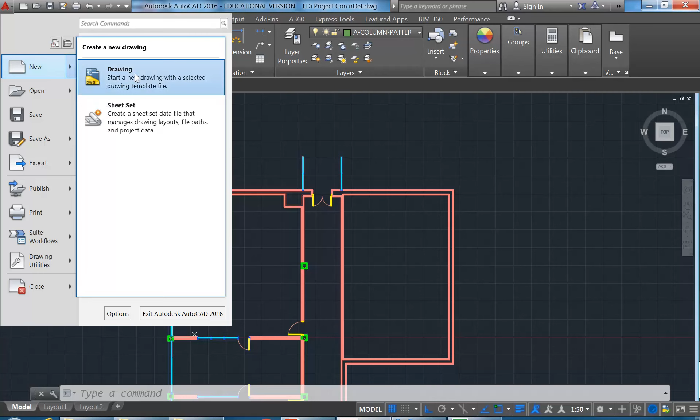So I'm going to make a new file, just going to the main menu, new, and then drawing, and make sure I use the ACAD ISO template as always.

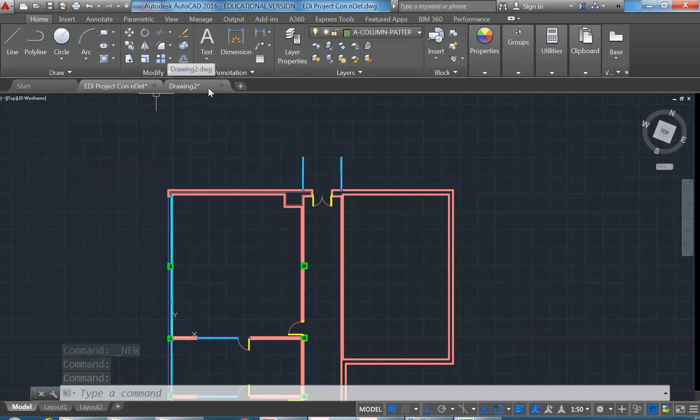And then into this file I'm going to create an XREF, or an external reference, using the previous file. So just remember, in AutoCAD you always have tabs these days at the top. If you're using an older version of AutoCAD you won't have these, but they've had the tabs for the last few releases. And the tabs make it much easier to switch between files.

And it's very important with AutoCAD that you can navigate between different files, because you'll often have the drawings separated and distributed between several files in most projects.

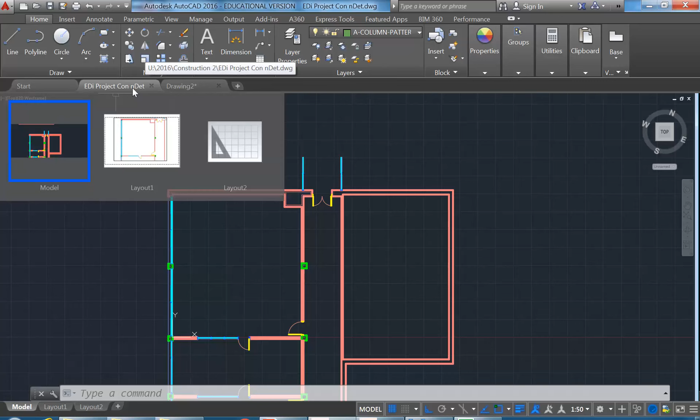And so I'm going to go back to the original file and make sure it's saved. And you can tell that it's been saved because there'll be an asterisk next to the name if it hasn't been saved. And that's a really important thing as well when you're working in AutoCAD, to realise which files have been saved and which ones haven't.

So this one here, Drawing 2, hasn't been saved yet, but I'm going to go to the main menu and use Save As to save this. And I'm going to call this Sections.

So any operation that you do, even just changing the view, is in AutoCAD something that is considered as a step you could save. So here you can see there's an asterisk now. Probably don't need to save it, but that's an interesting difference between, say, AutoCAD and Revit, where it doesn't save all of those things.

So now I can bring in my file with the plan, going to the Insert tab, and then using the Attach option. So that Attach tool is like a grab bag of different import tools. You use it to bring in images and lots of other file formats.

But most importantly for you, it'll bring in drawing files as external references. Now I better just show you before I complete that.

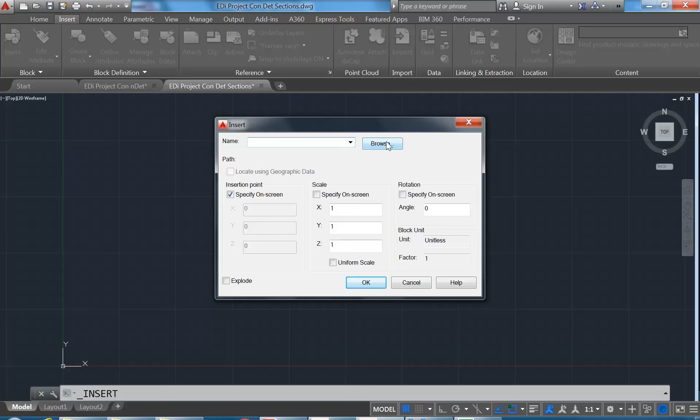and instead of choosing from your list of blocks, I don't have any in this file anyway, but instead of choosing from there, you go to Browse, and then you can insert any drawing file you want, and it won't be linked. So there's a title block, for example. You wouldn't want that to be linked.

And can you maybe think of some instances where you wouldn't want something to be linked? Why wouldn't you want something linked to another file? Yeah, so yeah, that's one. Yeah, pretty much.

Yep. So basically, what you're saying is you don't want the thing that you've inserted to change, like you're saying. So you want to keep. Yep. Then that's right. So, and it's important to think about that.

Sometimes once people see external references, they just think, I'll insert everything as an external reference, because why wouldn't you want everything to be linked? But quite often you don't want the linking because you don't want things to change.

So think of an example where you have a project that's completed, and you've issued that to your client and to everyone else, and you've included a certain title block or a certain block with a certain type of maybe toilet or bathroom basin or something like that.

And then later on you've gone and updated your library and changed that object, or you've changed your title block. If you've done it with a link, those things are going to change in the project documents.

And it's really important that you don't have those things changing. They need to be maintained as they are so that they can be issued again in the same way. So don't always do external references when you're trying to link.

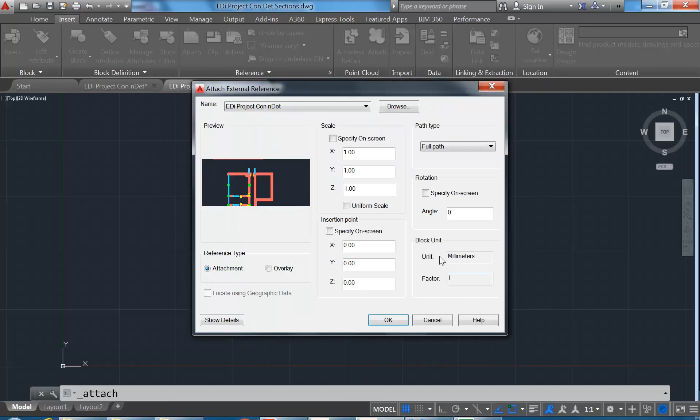Here I'm going to choose my file, click open, and you'll see you have a range of options very similar to what you get when you're inserting a block.

The main one to look at is the insertion point. You can turn that off so the tick box is cleared and it'll say 0, 0, 0. Also check your block units - if that says inches, let me know, you'll have to change a setting in the original file. That's often a giveaway that you've used the wrong template. Everything else there you can just leave turned off.

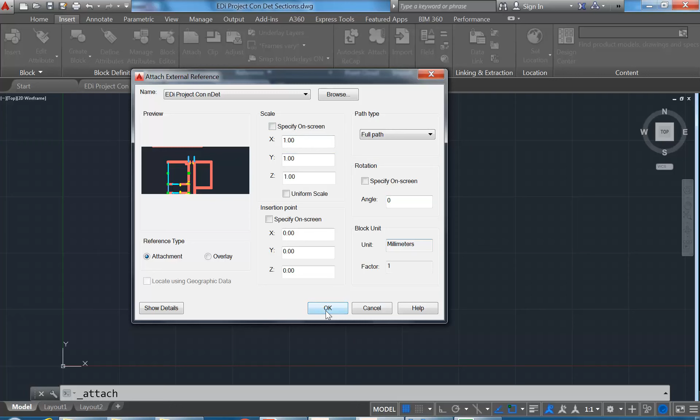So it's going to come in at the original location and with the original angle. If I click OK, double click with the wheel if you've done that, and you will see the object inserted.

We'll look at some different ways of working with the external reference itself later, but all I'm going to do now is change the angle so I can start drawing my section. So the only change I'm going to make is first changing the angle, and then we'll look at clipping it. With it selected, it's a bit like hatches and a few other things in AutoCAD.

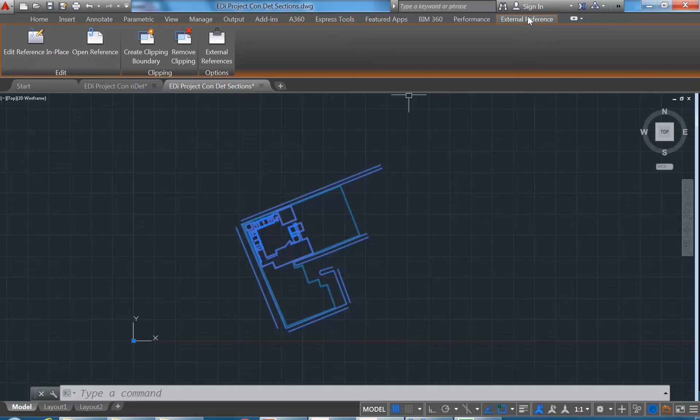It'll bring up a special tab that you don't get normally. Look at the list of tabs - it ends with Performance. But if you select something like an external reference, you get this extra tab which has settings that are just for that object.

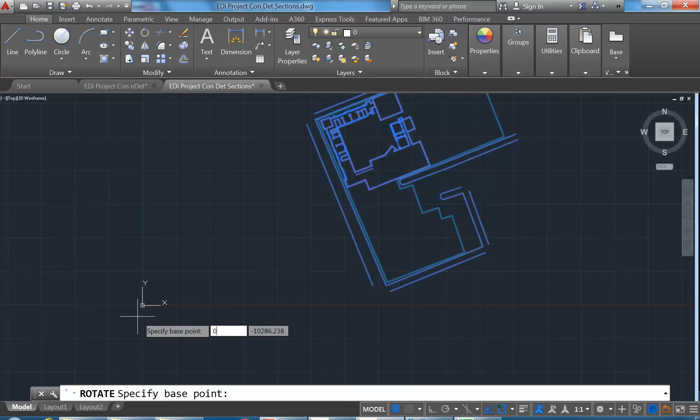I'm going to go back to the Home tab so I can choose Rotate. In this case, we can probably keep it with 0, 0 as the base point, so I'm just going to type 0, 0 and press Enter.

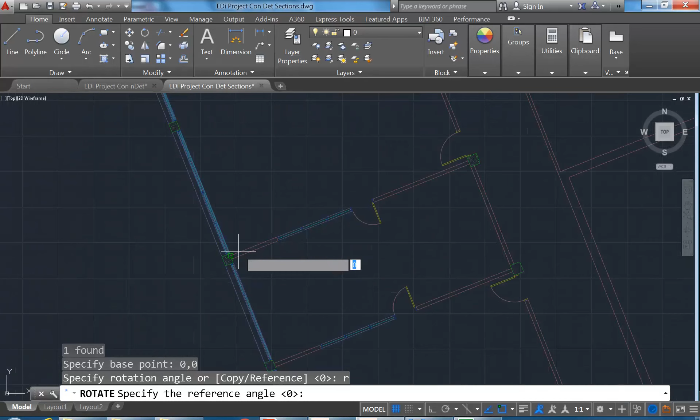But now I need to use a reference angle, so I'm going to type R and then Enter, and then pick a point. Maybe so it's clearer this time, I'll use a point close to the room you're working on. So I'm going to choose one of these lines, and if you're wondering why I'm choosing the line for this wall, it's because I want that line to be straight - I want this line to be horizontal.

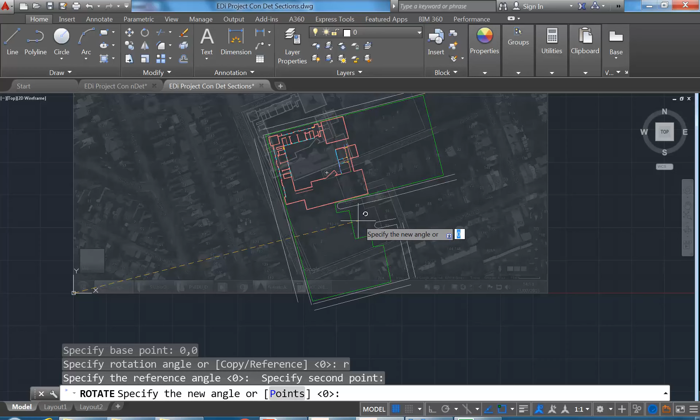You'll see now it's going to begin with that angle, and I can come across with ortho turned on and just snap that to 0 degrees. So you can see how now the room is - well, these walls are horizontal, these walls on the side are vertical. So everything's basically got right angles, perpendicular to the drawing plane.

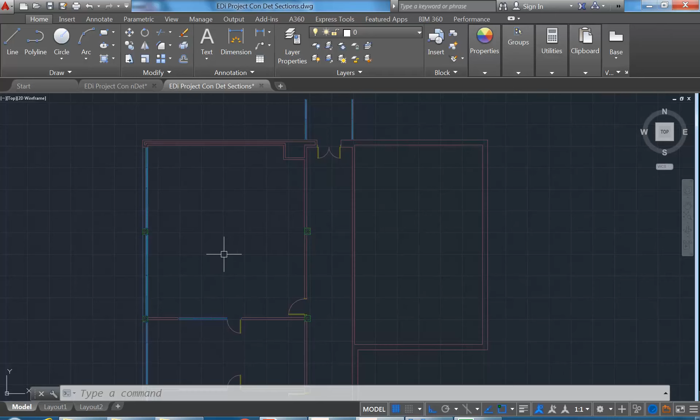Just zooming out there so you can see the whole thing, I'm going to select it, and then the next step is to clip it. That's really one of the main reasons we're going through this process.

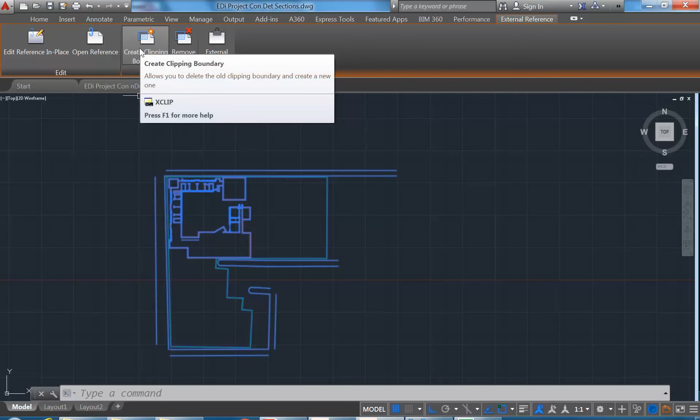So I'm going to go to Create Clipping Boundary - that's on the External Reference tab that comes up. You just need to select it, and then you'll see up on the External Reference tab, Create Clipping Boundary. If you don't see it, just press Escape, then select the external reference again - you've got to select your object.

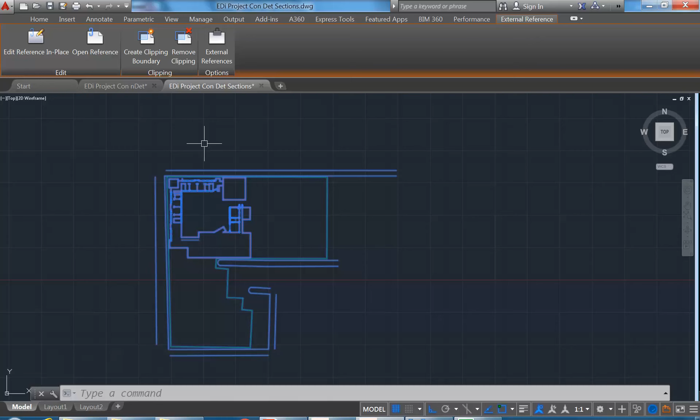So you just have to click onto it somewhere. I'll have a look at it in a minute, but it'll come up eventually. So I'm just going to go now to Create Clipping Boundary, and then choose the rectangular option, and then draw a border around this room.

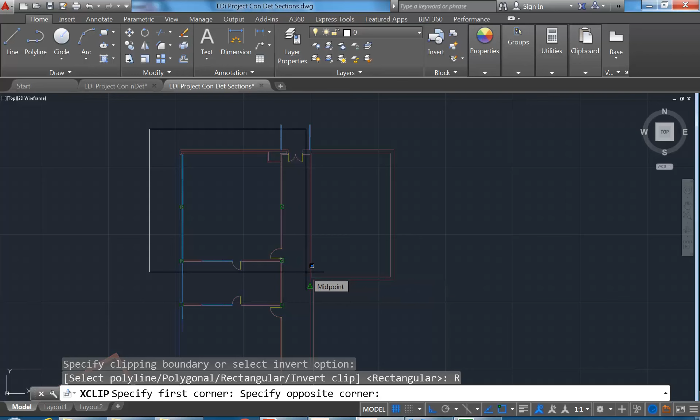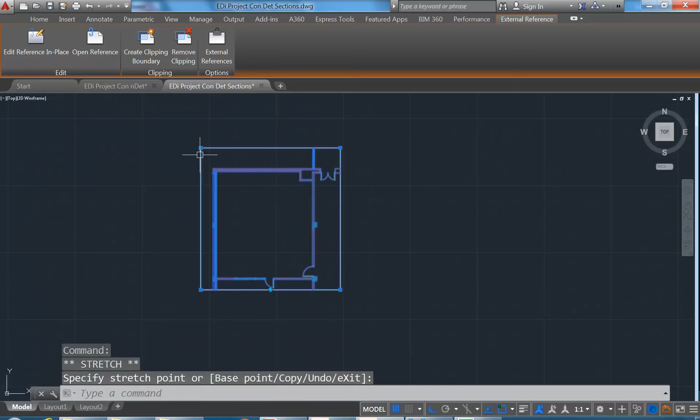Okay, so you can always adjust that afterwards. If you select it, using the grips there, you can easily adjust those points, fine tune the size. So maybe I'll give you a chance to get that working, and we'll look at doing the section next.